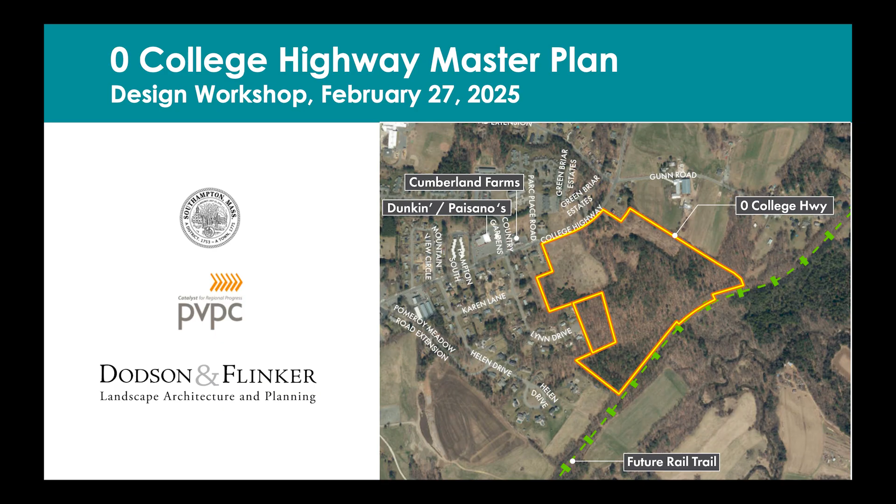This is going to be quite an exciting event for us, I think. Our first very interactive workshop in terms of a public visioning workshop about what we want to do with the land we purchased recently on College Highway. I'm not going to say the actual address yet, as you'll find out later on. We're having a bit of a naming contest, per se, to see what we can start calling this property. I want to welcome our colleagues facilitating tonight, folks from the Pioneer Valley Planning Commission and the consulting firm, the Landscape Planning Group from Dodson and Flinker. I'll turn it over to Peter to explain what the evening's going to be. You'll get to play with Legos - no, not quite, but almost.

Almost. Thanks. Can everybody hear me? Great. Yeah, my name's Peter Flinker. I'm the president of Dodson and Flinker. We're a planning firm in downtown Florence. We have an office in one of the old mills across from Cooper's Corner. A little closer? All right. So yeah, we're pretty familiar with Southampton and really glad to be here, but not too close.

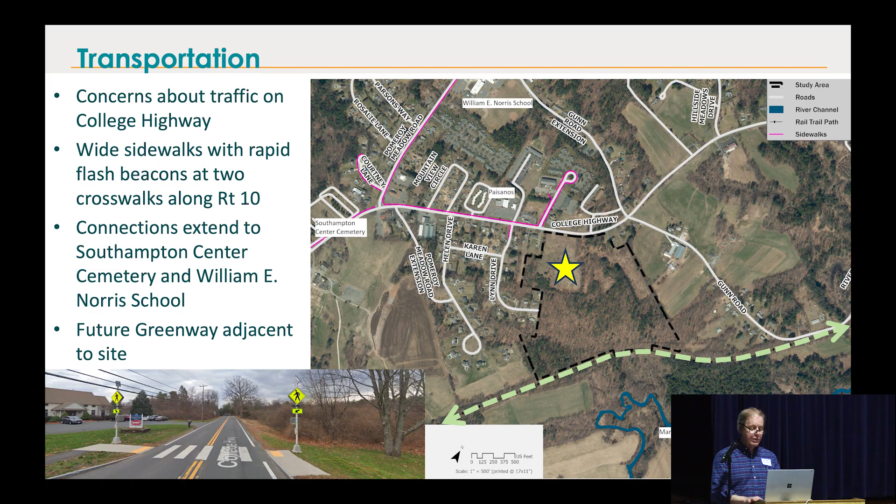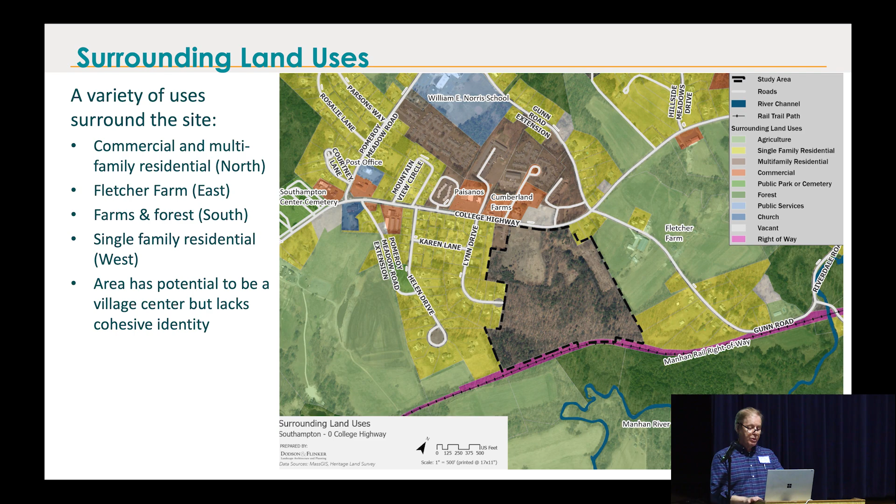In terms of land uses, as you know, the yellow — there's a variety of residential neighborhoods around the site. In orange, there's Paisanos and Cumberland Farms and some of the other retail uses. There's some office space, a few apartment buildings, and then the Norris School, which is in blue at the top of the slide here. And then the green is the protected land sort of surrounding the site.

In terms of ecological resources, some of these are protected under state law — there's a small area of wetlands at one corner of the site, and then the dashed line represents the so-called BioMap, sort of critical natural landscapes. This is areas that have been mapped by scientists at the state level to look at what's the most important land across the state for ecological value. Primarily it's the land adjacent to rivers and streams and ponds and the corridors that they create. As you know, the Manhan River runs to the southeast of the site, and then there's quite a lot of open land going up the ridges to the west and north.

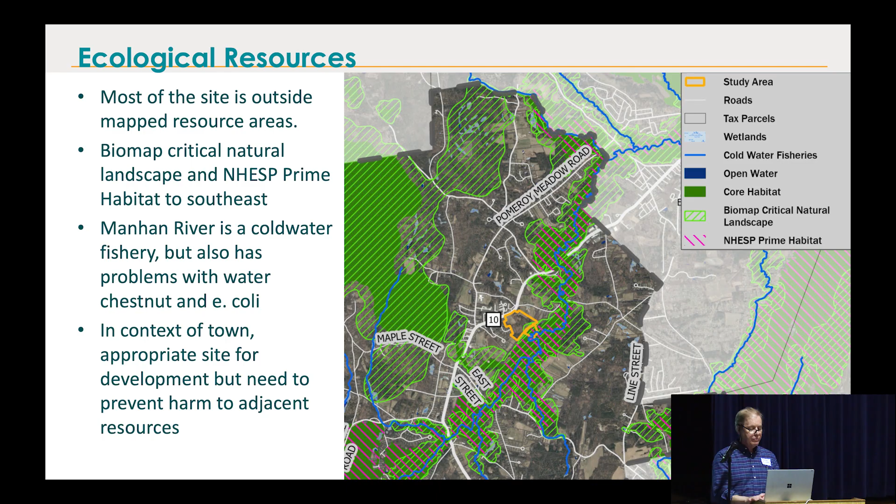In terms of water resources, this is a Zone 2 wellhead protection area, which is another sort of area we could spend 20 minutes just talking about — protection of the wellheads. But what that requires, as you know, is it limits the nutrient flow, the nitrogen flow from septic systems to basically one house per acre. So 4 bedrooms for 40,000 square feet. And that's the limit of the septic input that you can really provide.

There is the possibility, which we'll talk about later, of connecting to the sewer system in Easthampton, and the town is in the process of studying that.

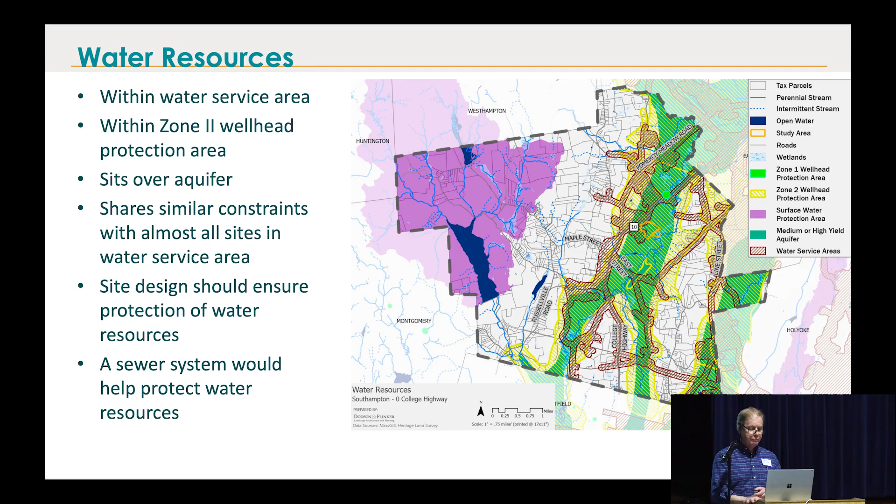This is a map of slopes where the green is basically very flat land, and the orange and red are steeper slopes getting up to 30 to 50%. So there's basically a wide bench at the top of the property, probably 25 or 30 acres out of the total 45 or so of the site.

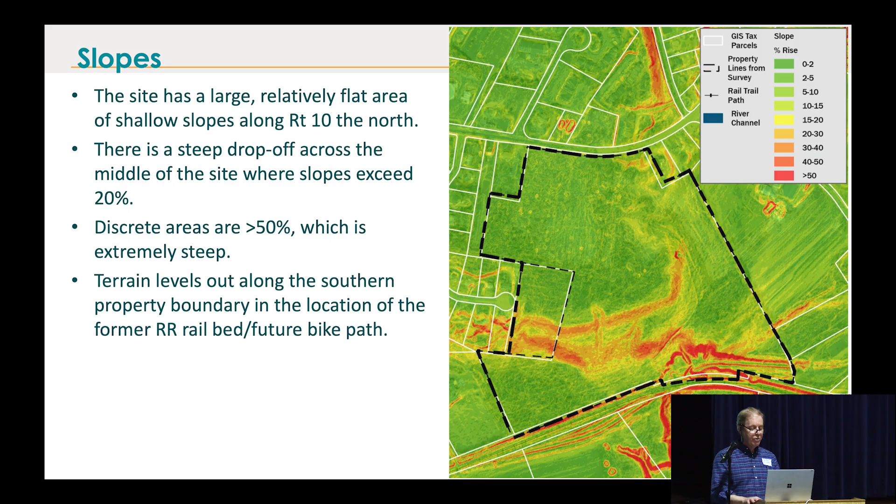There are small areas of wetlands that have been flagged on the site previously. So there's a corner down by the rail trail which is officially designated wetland. And then once you get south of the rail trail, there's quite large areas of wetland along the Manhan River. So probably the only part that's really developable is the part to the north and west of the rail trail.

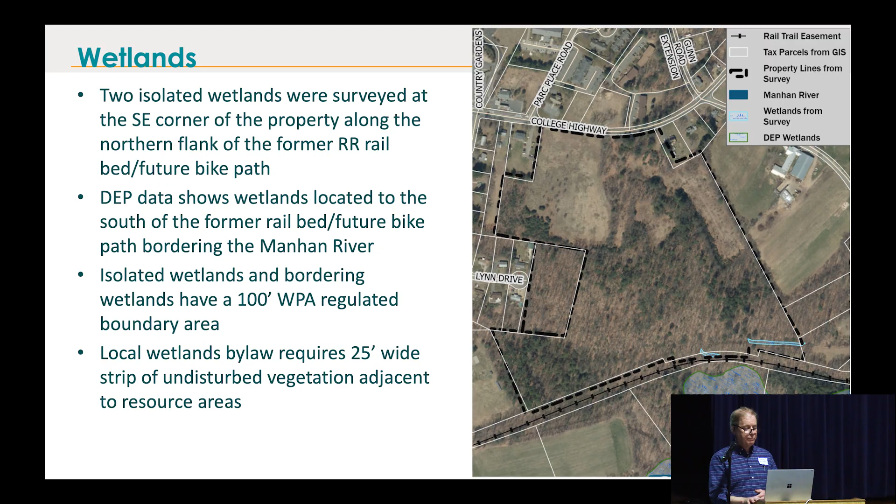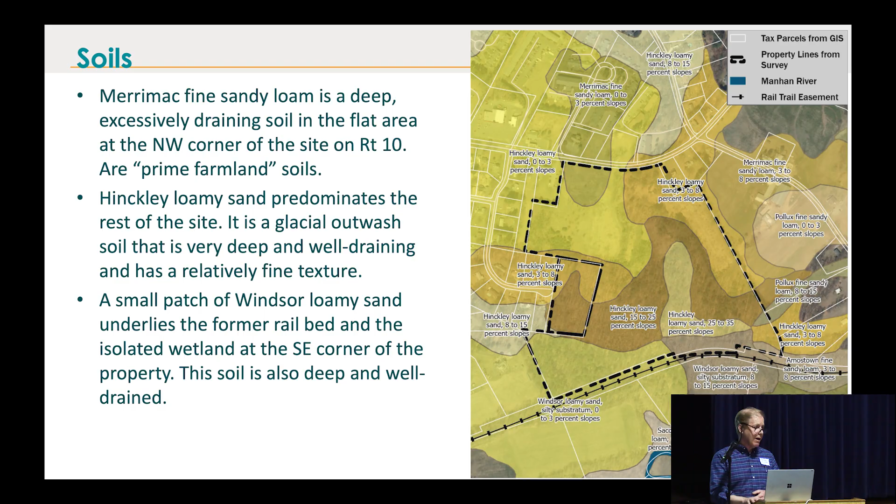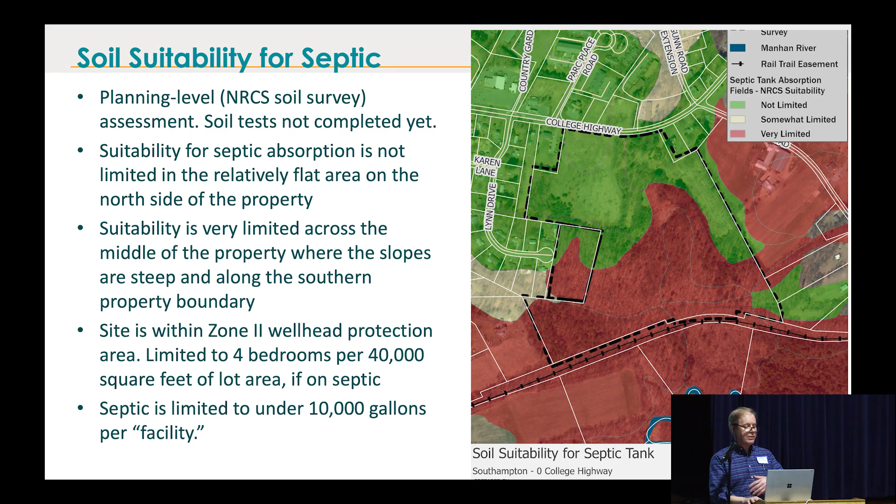This is soil suitability for septic. So the green, sort of halfway through the site and going toward College Highway, is the best soil for septic disposal. The red, primarily because of the slope and increasing wetness toward the south part of the site, is less suitable. And then there's the potential connection for the sewer line, which would follow Gunn Road from the neighborhood down toward a force main that would follow the line of the future rail trail.

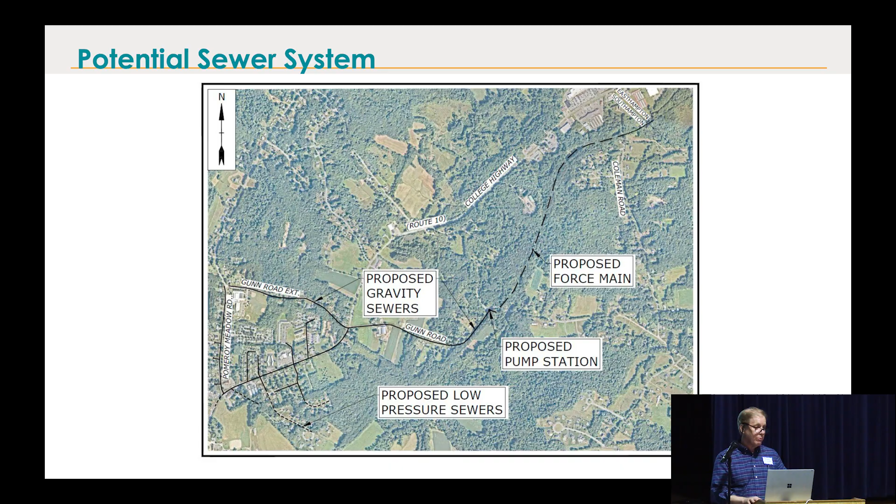Zoning, of course, is a given. The site is currently zoned residential village for the bulk of the site, and there's a commercial village strip about 300 feet wide along College Highway. The CV district allows two-family homes and town facilities. You need a special permit for a restaurant, office, or multifamily, and a 25,000 square foot minimum lot size.

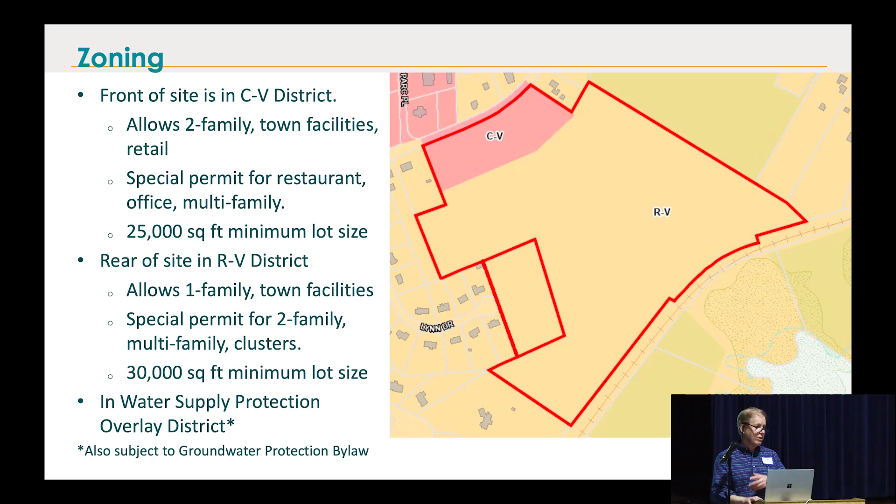The rear of the site, which is the residential village district, allows one-family homes. You could have a special permit for two-family and multifamily with a 30,000 square foot minimum lot size. And then it's all in the water supply protection district, which is probably the most limiting factor for future development.

So tonight we're sort of starting with a very open, not a clean slate, but a pretty clean slate when it concerns potential uses of the site.

We're taking as a given that this will be the location of the public safety complex. As you know, this was purchased at town meeting, and you heard a lot about the public safety complex, and that this is the sort of current plan for the complex.

It's got a little bit more compact than it used to be. The pink toward the left side is mostly the fire department, and the blue on the other side is the police department space, and then there's some shared spaces in the middle.

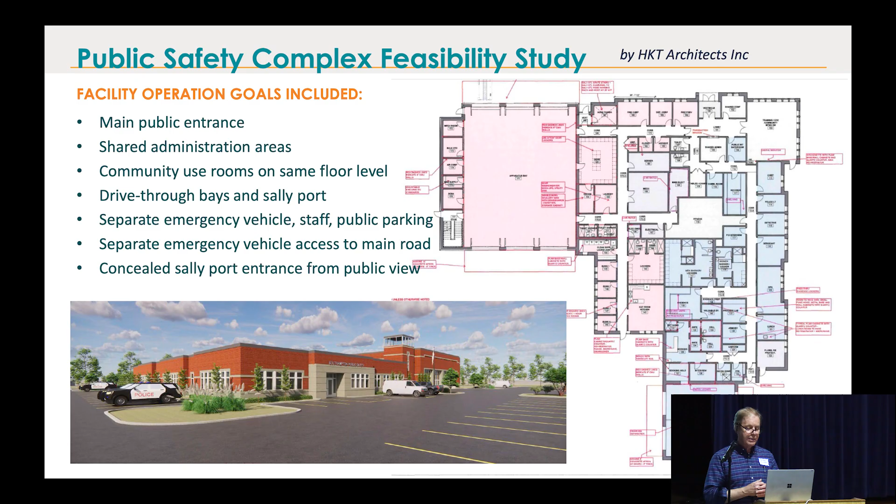In terms of the preferred site layout for the public safety building, this shows College Highway toward the top of the page, and then an entrance that would provide a wide driveway for the fire engines to come in and out, coming directly off of College Highway, and then a separate entrance that would provide access for the police department.

So this is sort of an idealized plan if you built the complex all by itself, which of course is one option. One of the things we want to talk about tonight is if it's not all by itself, if it includes other uses like the senior center and housing, what would be the best way to arrange it on this site? What uses might be shared, like open space, recreational areas, parking, and certainly we don't want to build more than one road if we don't need to.

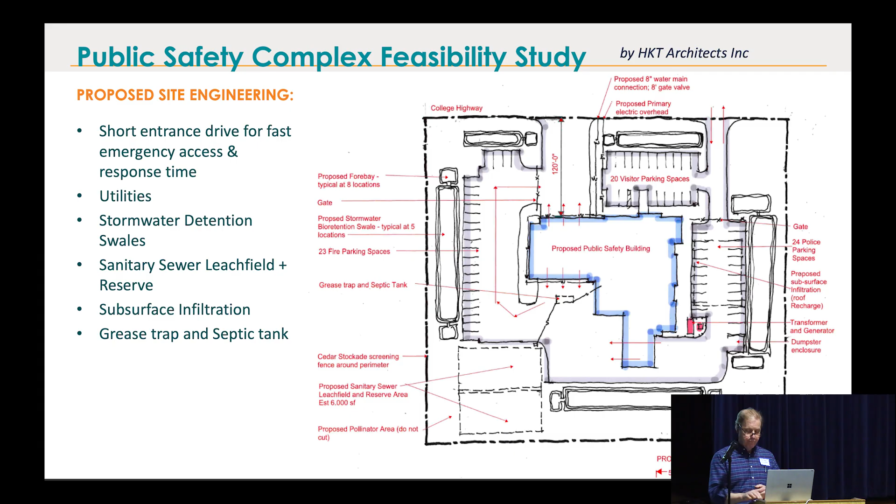This is the second big use that's probably going to happen on the site, which is the senior center. This is a plan done by Abacus Architects during their feasibility study for the senior center last year. They were thinking of a different site on East Street, which didn't pan out because of soil conditions. Now they're very happy to be looking at the possibility of having it on this site, which does have good soil conditions.

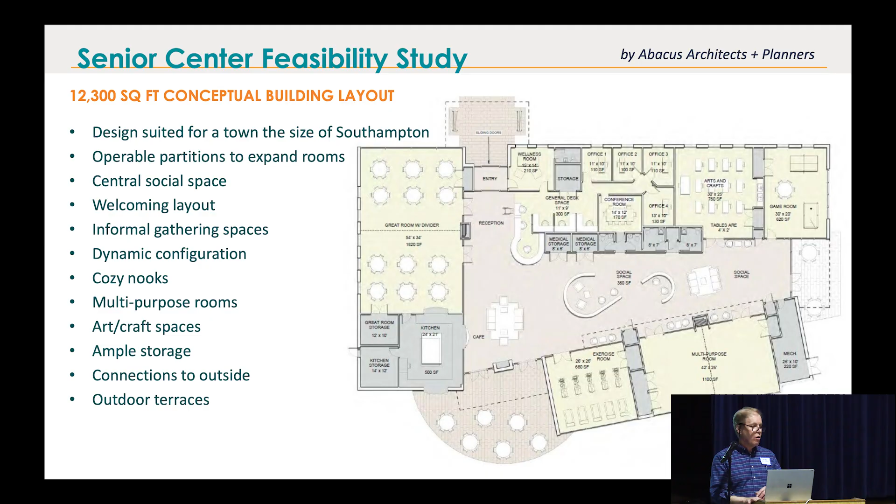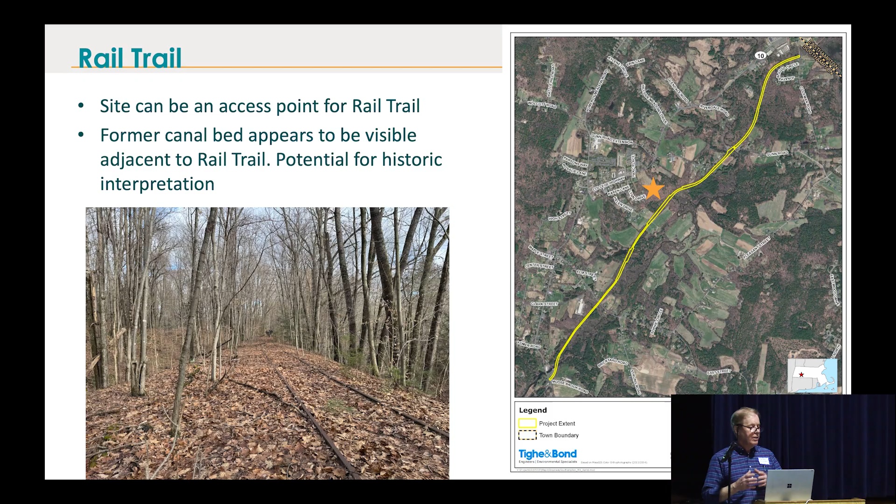The rail trail crosses the site, so connection to the rail trail is an important question in terms of uses on the site. Could you have parking dedicated for the rail trail? What's the best way to get from that parking lot to the trail itself, and so on? So that's a question.

Other potential site uses are really going to be a focus tonight: do we want to have commercial development to take advantage of the frontage on College Highway? Do we want to have housing on the site? The Housing Authority is very interested in building housing on the site, something in the order of 40 or 45 units. Beyond that, we want to talk about where that might go on the site and what it might look like.

A big reason for that is housing is becoming, in this whole region, not just Southampton, increasingly out of reach for people younger than most of us in this room. Our children are not able to find a house here the way we could when we were in our 20s and 30s. The median price has gone from $450 10 years ago to over $550 today.

There's a concept in planning called the housing cost burden. The idea is you should be able to get housing and not spend more than 30% of your income. But in Southampton, almost 25% of homeowners and 40% of renters are housing cost burdened.

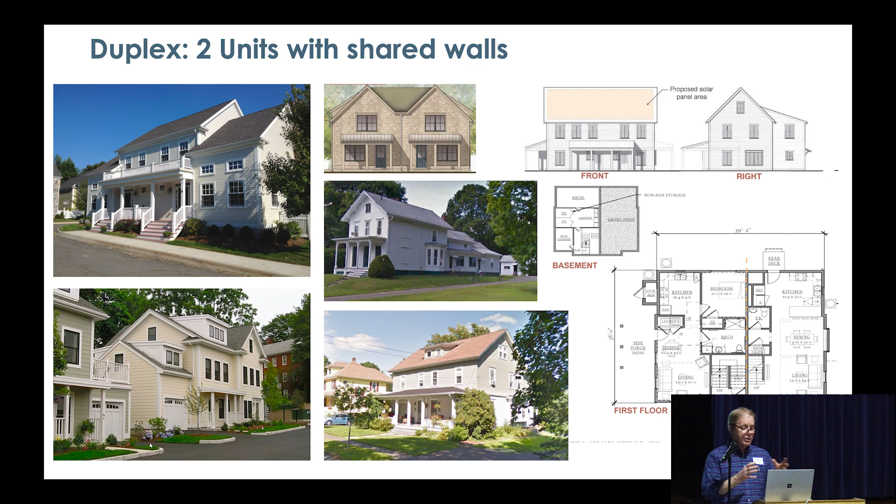Or you could build something larger, which is a townhouse. Increasingly we're thinking of these as a so-called manor house. We're all familiar with big houses that extend, 5,000 square foot manors. These were built historically, and they've also been built recently. There's really no reason you can't build a townhouse with 4 or 5 units that looks like a big single-family house.

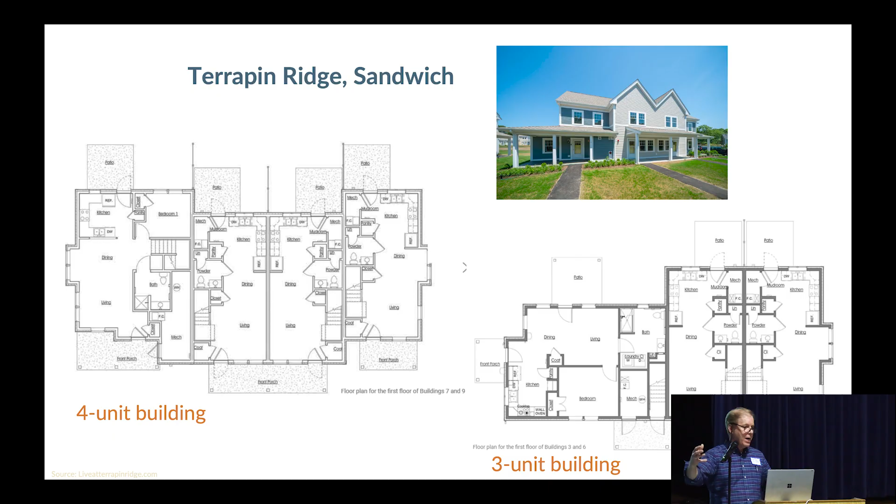If you have a big part of the house, there's that saying: big house, little house, back house, barn. There's no reason you can't have 5 or 6 different families living in that kind of connected farm structure. And when you drive by, it looks like it's always been here. So that's an interesting possibility.

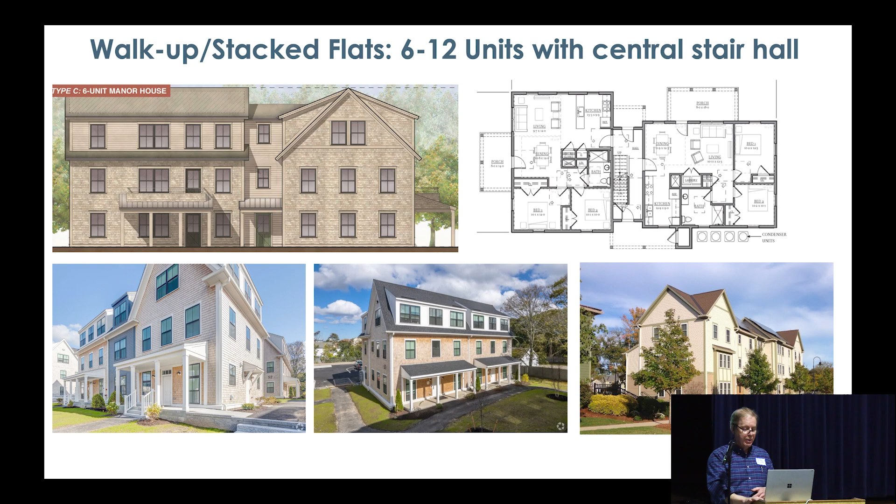And apartment buildings themselves don't have to look ugly. We've looked around the state, and there's a lot of people experimenting with apartments that really look like a collection of smaller buildings that happen to be connected together. They could be a large manor house style, like in the upper left. The lower right is kind of a ski chalet, or it could be a shingle style building in the lower left.

There's a lot of design work you can do to make it feel like it fits in a traditional neighborhood, and not something like you see in apartments out by the interstate.

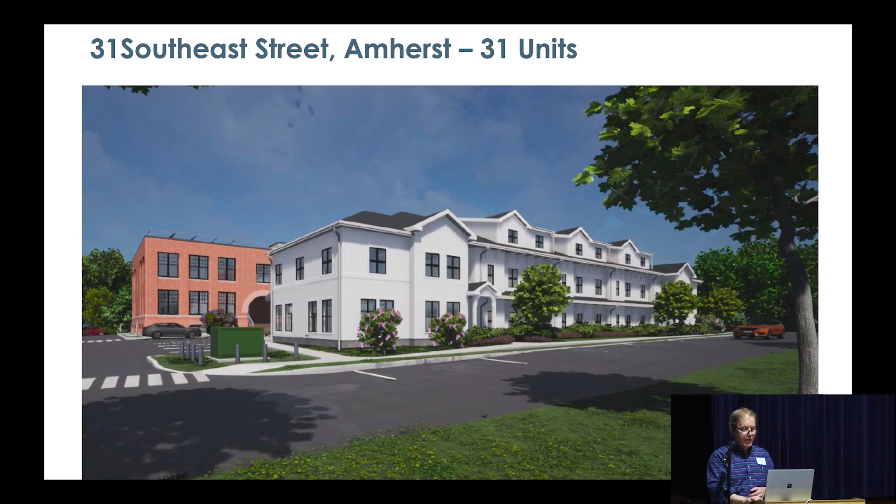Here's an interesting example - a new project still in permitting in Amherst, with 31 units. They're also renovating an old school property as part of that. It's a fairly large building, but it's broken up with different wings, dormers, and porches, so it has more of the feeling of a single-family neighborhood instead of just an apartment building.

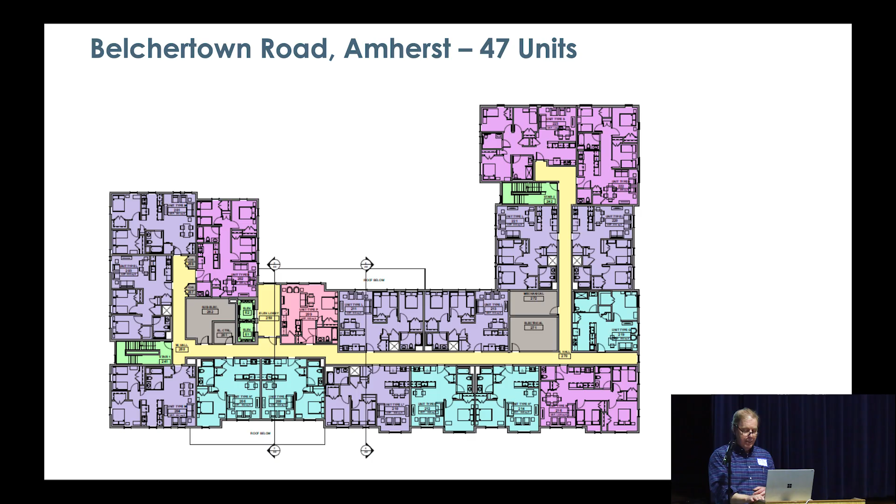This is what makes an apartment hard to design for a site like this, because by definition it has a central corridor with apartments on both sides, making it quite a wide building, usually 60, 65, 70 feet wide. So it's hard to make that look like a single-family structure unless you break it up like this and have enough of a roof, enough of a peak, that really looks more like the proportions of single-family houses that have been connected together.